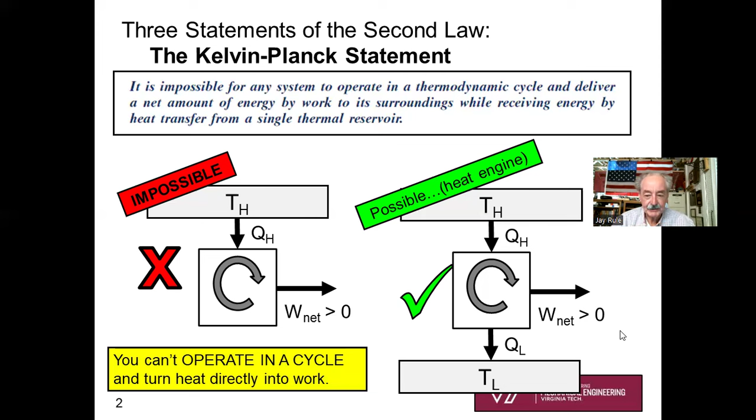As I was asking my question in class, I couched it in terms of an example problem, and this is representative of what I think I asked. So here's an example problem. Let's work it out together. It should be familiar, and it should be like child's play to you now. You should be really good at solving this problem.

It says 0.1 kilograms of argon is contained in a piston and cylinder. The initial pressure of the argon is 200 kPa, and the initial temperature is 280 K. Heat is added to the argon in an isothermal process until its volume doubles. We're adding heat at constant temperature. Here are the three homework questions: What is the final pressure of the argon? How much work is done during this process? How much heat is added during this process?

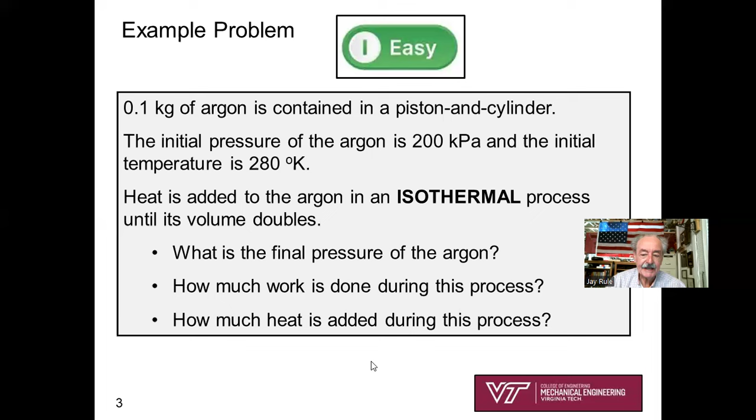Let's solve this problem. And you kind of go along, think ahead before we go through the solution together. Let's start with a sketch and plan what we're going to do before we put pencil to paper. We've got a closed system. It's a piston and cylinder. The mass is fixed, M1 equals M2. It's an ideal gas, it's argon. It's a monatomic gas. We remember the ideal gas equation of state, PV equals MRT. That's going to help us, isn't it?

Let's look at our sketch. Here's our piston and cylinder. Here we are at state 1. I'm showing heat added, work being done. The volume is doubling, which was given in the problem statement. I'm writing down that T2 equals T1. It's an isothermal process, and I'm depicting my new closed system. Went from state 1 to state 2. All right, we're going to solve this problem. We're going to answer the questions. Well, how will we attack it?

Well, let's see. Let's solve for V1 first with the ideal gas equation of state. P1V1 equals MRT1, and check off what we know from the given information. Okay, got it. We'll find V1. Given in the problem, it said the volume doubles, so V2 equals 2V1. That's pretty easy. And the question was, what's the final pressure? We'll use the ideal gas equation of state again. So P2V2 equals MRT2. And what's T2? T2 is exactly equal to T1. So we've got the pressure made.

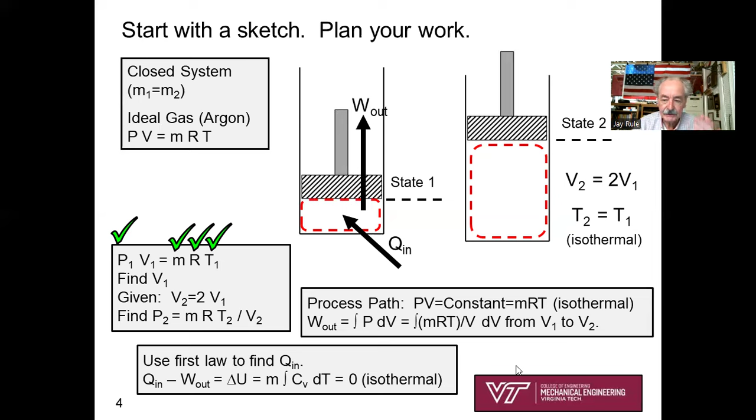All right, let's do the first part first. Let's try to figure out the final pressure. We've got argon, so we'll look up the molecular weight of argon. It's 40. We'll solve for the gas constant R for argon, R bar 8.314 kilojoules per kilomole Kelvin. We're going to enter our given numbers. M is 0.1 kilograms, initial pressure 200 kPa, T1 280 K. So we solve straight out for V1 using the ideal gas equation of state. V1 is 0.0291 cubic meters.

Well, V2 is double V1. That's pretty easy. So we'll double V1, we'll get V2. Back to the ideal gas equation of state. P2 is MRT2 over V2. And so we've got P2 is 100 kPa. It's half of the initial pressure. All right, great. So we're a third of the way there on our homework problem.

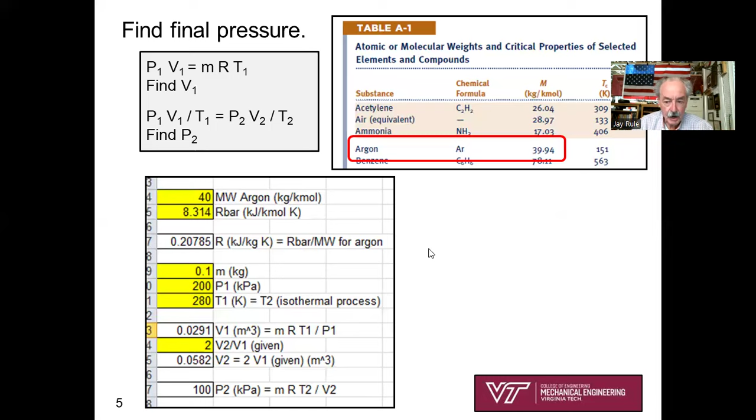What's the work? Well, I hope you immediately know we're going to draw a pressure volume diagram. We're going to draw the process path. We'll look at it with our eyes. Well, that's a hyperbola, PV equals constant. And then we're going to write it. We'll do the math, right? Work out is the integral of PdV.

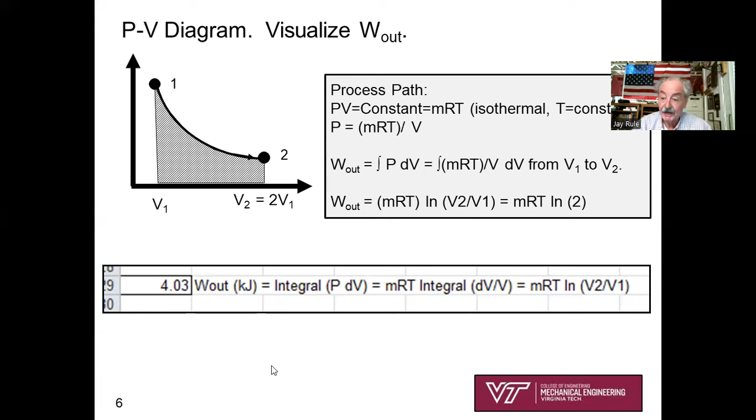P is MRT divided by V. That's the ideal gas equation of state. M is constant, R is constant, T is constant. We pull that out of the integral, so we've got the integral of dV divided by V. That's the natural log of V2 minus the natural log of V1, which is just the natural log of V2 over V1. So we've got an easy formula that we derived ourselves, not looked up in the book. Work out is MRT natural log of 2, since V2 over V1 is 2. We do the numerics and get the work out as 4.03 kilojoules, keeping our units straight. We're 2/3 of the way there.

We will write the first law of thermodynamics for a closed system. Q in minus work out equals delta U. No change in kinetic or potential energy. On the right-hand side, we observe our process was isothermal. So dT goes to 0. Right-hand side is 0. Q in equals work out.

And that was the nature of my question to Dr. O'Brien in the master's level thermo class. He got a grin on his face. There were some students rolling their eyes that Jay was asking this really moronic question, right? But they kind of kept quiet.

And I said, doesn't that violate the Kelvin-Planck statement? We're transforming heat directly into work. And I just described a problem where we did that. And we do that over and over again. And he kind of smiled. And here was his answer.

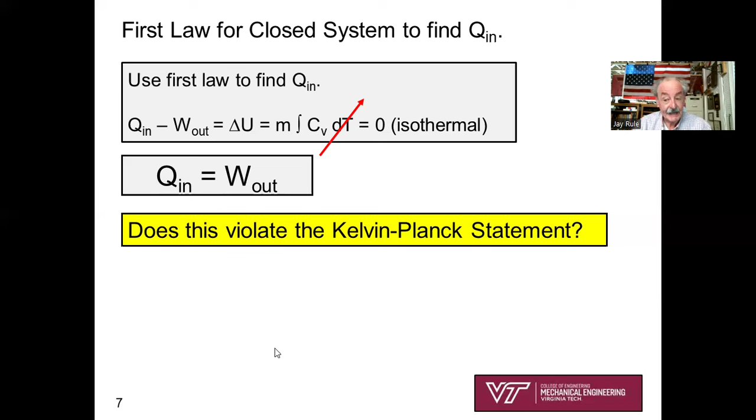So Dr. O'Brien reminded me that the problem I described does not violate the Kelvin-Planck statement. He said, well, Jay, what you just described, that was a process. That was not a cycle. What you just described was process 1 to 2. And so that's definitely possible, okay?

Remember that a cycle, over here on the left, goes through some special process, 1, 2, 3, 4, 5, 6 to 20, back to 1. That's what completes a cycle. You have to start and end at the same state. Okay. And so the little example problem I described in class was not a cycle. It was a process.

And so, boy, Dr. O'Brien answered that question so respectfully. He didn't make me feel like a dum-dum. I kind of kicked myself for not asking Dr. Jones as an undergraduate the same question because I was so afraid that Dr. Jones would shake his head and say, oh, I'm so disappointed in you, Jay, that you didn't pick up on the subtle point that what you just described was a process and it was not a cycle. Well, at least I got the courage to ask that at the graduate level.

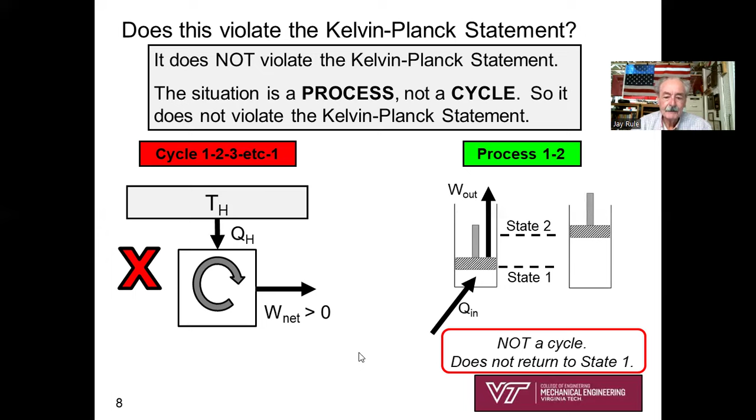And so I want to encourage you folks to ask questions in class when you have some confusion as well. I don't think your instructor will yell at you for being a dum-dum. I didn't feel like my question was that dumb at the time. I'm so glad that Dr. O'Brien cleared that up for me, reminding me what I should have picked up, that transforming heat into work is possible because it is a process and not a cycle.

So here's the recap. It's impossible to operate in a cycle and transform heat directly into work. That's the Kelvin-Planck statement. What is possible, kind of my question in class, is it possible to transform heat into work? Sure it is, in a process, but you can't do it with a cycle. So that really helped clear things up for me, and it improved my understanding of the second law.

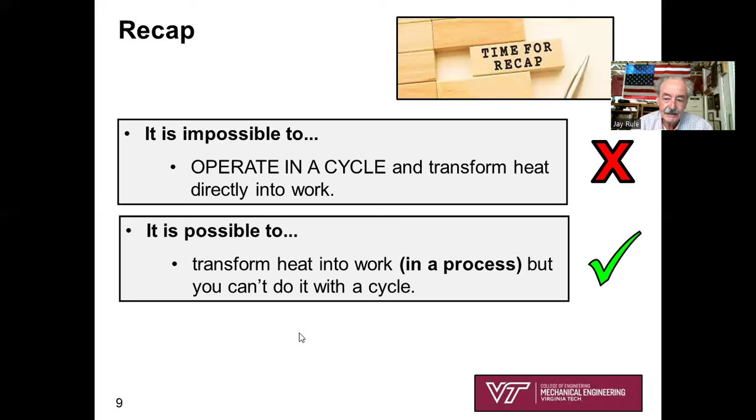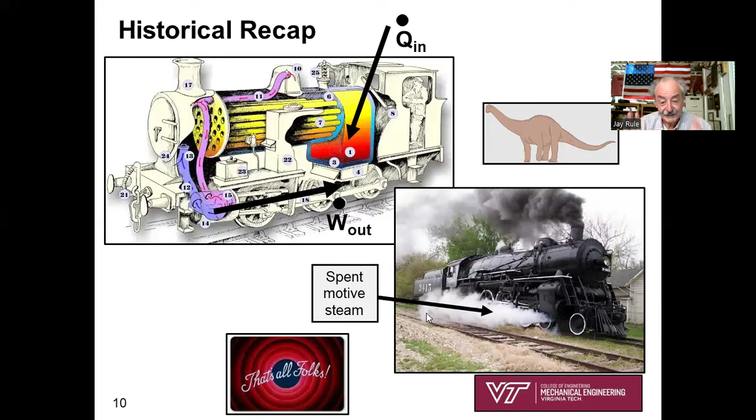Okay, I hope those remarks help you in your understanding of the second law, particularly the Kelvin-Planck statement. Remember that there were three statements of the second law in Chapter 5. Really, all three of those statements have to do with what's possible and what's impossible. That's what pulls those three statements together. It can be confusing, can make you think pretty hard.

I want to thank that student for asking the question about the Kelvin-Planck statement, because it caused me to reminisce about my own undergraduate experience and some of the questions that I had myself about the second law. So there you go. Don't hesitate to go back and look at some of the previous videos about the second law in Chapter 5.